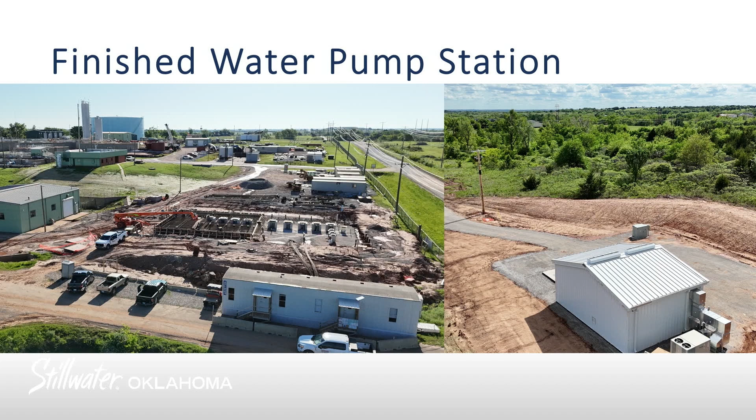And then to the right, also part of this same project, is the recovered water pump station. One of the first things we do when water gets to the water treatment plant is we knock out all the solids and they go out to these lagoons, but with it comes water. So we recirculate that water back up to the beginning of the plant, so it makes the plant more efficient as well. So this project here is about a $30 million project all in.

Let's see, I think I covered most of these as well. So the next project I want to talk about is the chemicals project. It started at the beginning of this...

Yes. If you could go back just to the funding there. The $30 million, partially funded by ARPA. The rest of it's coming out of basically rates, correct? Correct, yes, okay. Sort of. And Candy will get into more of the dollars at the end, so.

And one other question, what's our current water consumption? This is up to 24 million gallons a day? So, yeah, on average, we use about 6 to 8 million a day. Our peak is around 14, and historically, there was a peak in the winter and also in the summer, the hot days, everybody's running their sprinkler systems. We also experienced a new peak about a month ago when we had the fires. That was around 14 as well. So,

Someone's going to ask this question when the meeting's all over. So with the data center added, what is our average consumption expected to be? Yeah, I've been involved. So we talked a lot about this during our OG&E vote and the public vote, and the economic development agreement that was approved by City Council authorized 2.7 MGD for the first 2 phases. There are projects that are benchmarks that move it up to 3.5, but the current allotment is 2.7 MGD.

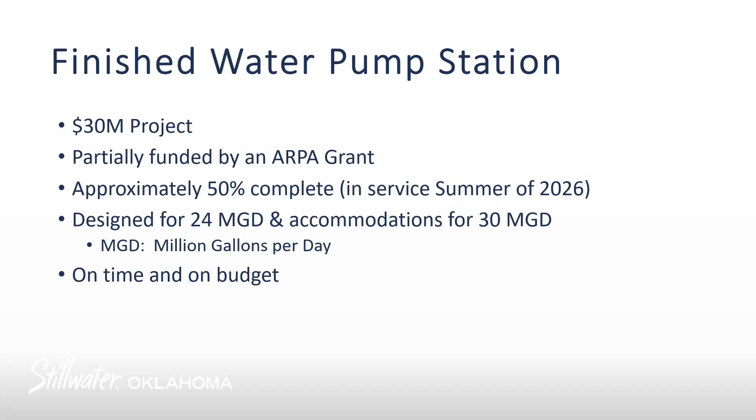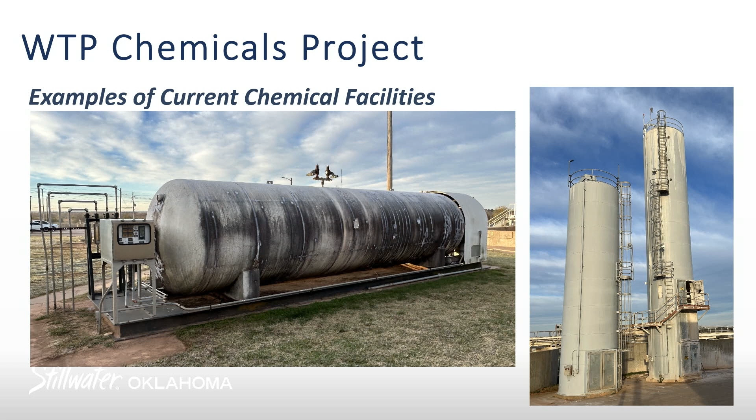And so some of the other things we're going to touch on this project, we're going to touch the ozone system. So that's our primary disinfectant. So that's one of the last things we do before we send the water out to distribution is we zap it with some ozone. And then the other thing we're going to touch is the chlorine system as well.

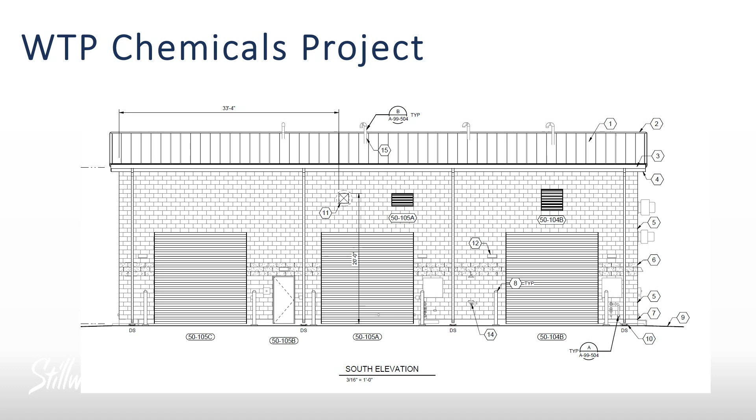I think I've covered a lot of these. We're about 10% done by dollars. So this is being designed for 18 MGD and accommodations up to 24. And again, it'll improve the water quality, and this project's on time and on budget.

And so the last project I'd like to talk about is a very exciting one. We're working on a secondary water source for the city of Stillwater. So I know you all know today that our water comes from Kaw Lake through a 36-inch steel pipeline that was built back in the early 80s. And we need to run some equipment through there where we can see where the corrosion pits are, and we can focus on strategically making those repairs at a very cost-efficient amount of money by using this equipment.

So in order to do that, though, today you can only shut down that line for about 6 hours, and then we start to run out of water. And so we need this secondary source to feed water to the city. And so that's going to be one of the reasons why this project's important, is for water resiliency. But it's also important for a very cost-effective way to do peak shaving.

And so peak shaving is just like we talked about earlier, our average demand is 6 to 8 million gallons per day, but it can go up to 14 as well. And so you really need to design your water source for your peak days. And so that would mean building a secondary line all the way down from Kaw. Well, that would be very expensive, but a very cost-effective way is to build a 7-mile pipeline over to Lake McMurtry, where we also have water rights.

And we can also move water strategically from Kaw to Lake McMurtry, and then when we're ready to use it, we can bring it back. So on those peak days when we're not getting the water we want from Kaw, then we can turn on the McMurtry line system and supplement that water as well. And so that's peak shaving. And so this probably saves the ratepayers $100 million by doing this project.

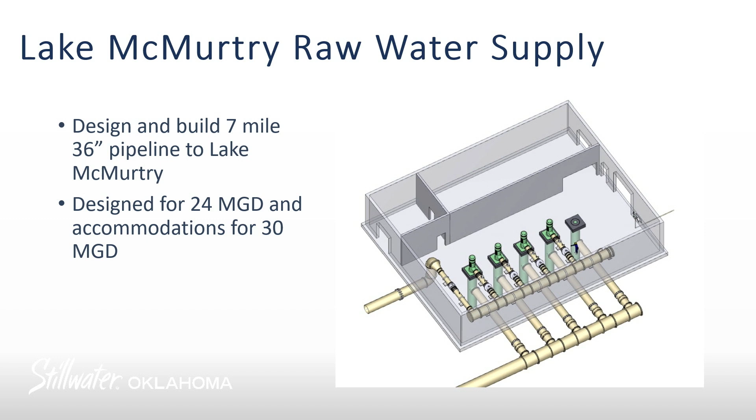And then we're also designing, because we deliver water to the Otoe-Missouria tribe, that if we're working on the north end of the Kaw line, then we can push water all the way up to the Otoe-Missouria tribe. And so they will always have a water supply source. If we're working on the segment past that or south of that, then we can feed them from the Kaw line, and then we would feed ourselves from Lake McMurtry.

Let's see, so we've just completed the 60% design of the pipeline. We're very close on the 60% design of the pump station. We expect to start talking to landowners for easements in the fall, and then start construction in the spring of 2026, and then put the line in service in January of 2028.

That's great. I was thinking it was farther out than that. Brady keeps pushing us to go faster, and we keep listening to him and following his orders. So don't want to disappoint him. No, it's a great project. It's good for the city, and so we're excited to get this one kicked off.

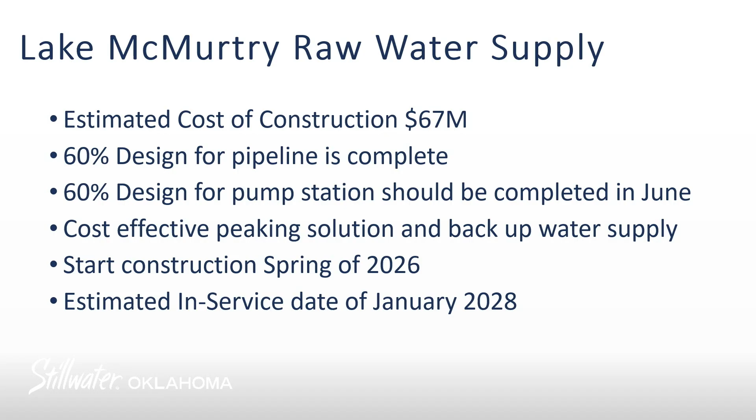Great. Just curiously, is Lake McMurtry below us or above us? Are we pumping uphill or downhill? Which way are we going? So it's downhill from the water treatment plant, but there's a lot of ups and there's a lot of undulations.

And so ironically, if we want to split the stream coming from Kaw, we'll actually have to have a control valve to push some of the water into the plant, and that way we can do a slipstream to send some down to McMurtry. So the way the hydraulics work out with just frictional losses and stuff, it's actually a little easier to get it into McMurtry than it is to get it into the plant, ironically.

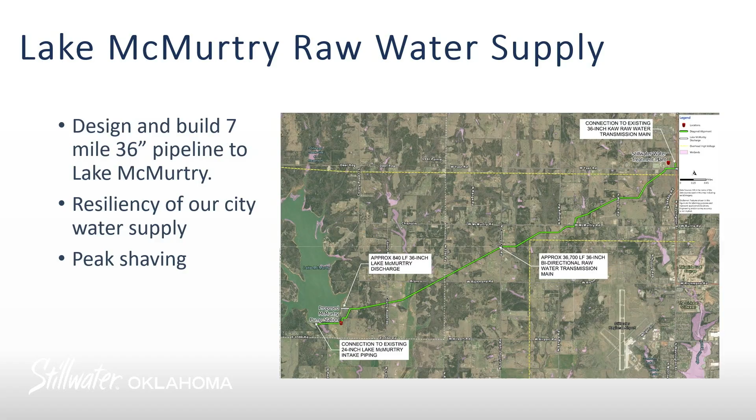All right, Candy. Yes, so McMurtry is as important to us today as Kaw was in 1975 when that group was making those approvals. And today when we're setting this up, it's just as critical. And we're moving into land acquisition next, because we're about 60% design, and next we'll move into land and charge forward.

So returning to this phased plan, Krista's talked about the highest priority, green, red, and yellow. And for the blue items, the solids contact unit, filters, and clear well, the SCU rehab maintenance level projects are included in our FY25 plan. And the filters and clear well are going to be added to our FY26 plan that is just now beginning to be scoped.

This is what that is looking like right now. We've asked our consultant team to start with a scope. It's an expansion from 18 to 24 because our demands have increased and we know about some new demands in our system, with an industrial customer being one of them. And also our agreement with OSU that at any point they might be a backup customer to us, so we have to think about them. And when you get to a place where you're 80 to 90% of your peak, you have to start planning because it takes 5 years to go through permitting and design and all of that, construction, startup, everything.

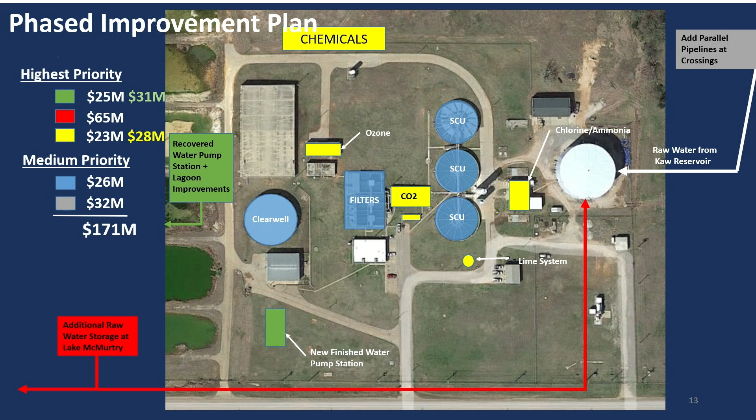And then during some of our evaluations that started in around '17, we identified our filters, and that is on the plan for the filters, the whole filters. We have some problems with our filters in the way that they backwash and in our access to the filter gallery, and the configuration is a disadvantage to us, and so it's been recommended to us that we replace them completely.

We right now have that one about to be abandoned, if it's not already permanently abandoned. It's about to be disconnected instead of just valves shut per some DEQ requirements. And at any plant, if you don't have two of them, you can't maintain one of them. So we have to have a second clear well, and we'll look at that. For an expansion, the chemicals are always looked at.

And speaking of grants, this is a bit of a summary to show you what we've received grants for so far. The yellow or the blue rows show you the projects that are either complete or in construction or in design or in planning. And the grant approved so far is about 9.5 for different construction projects. The grant applications we have right now only for the supply and treatment is 1 million that's going to be related to the North SCU.

There were ARPA funds used for design on the finished water pump station, so you could really add 2 to that 9.5 in total to get 11.5. And then for the future projects where we're not really sure of the total cost for the water treatment plant expansion, filters, clear well, PFAS, that's all just question marks. We'll end up using a lot of loans.

We're working with finance right now on how to fund the FY25 program and McMurtry, which total about 95 million just between those two things. The FY25 program has more than just, yes, it's a heartbreaker. So a lot to spend. Thankfully, we did the rate increases in late 2023, and those are going a long ways to help us pay back these loans. But this is critical needs, and we're pushing through as quickly as we can.

Yeah, because when you say loans, that's a revenue ratepayer loan, right? I mean, we're paying those loans. We get those relatively low interest rate loans through the Water Resources Board, SRF, or different options, yes. And then we pay those loans back from rates. Usually 30 years.

So the things that were on the other slide, the high priority, the green, red, and yellow, we have those. Okay, I'm looking at all of the projects we just discussed. The green and the yellow are in process, and then the red, which is the Lake McMurtry, we're at 60% in terms of design, correct? Yeah, when you say in process, if you're talking about construction, there are some that are actually done with construction. Lagoons and one other one. Cathodic protection are done completely off of our books.

And then recovered water pump station, recycled pump station, and the new finished water pump station are being built. And then the chemicals project is in construction. Okay. Just making sure I understood. And the red is 60% design, moving into land acquisition next. So when that pipeline's done, all of those high priority items will all be done. Indeed.

And honestly, the medium priority stuff will probably be done, some of it. SCUs, filters, no. We're going to do filters with our plant expansion. Chris, what was your date for being done with McMurtry? 28? Yes. We won't be done with our plant expansion by 2028. Not construction, maybe design. It does take a while to move through these steps.

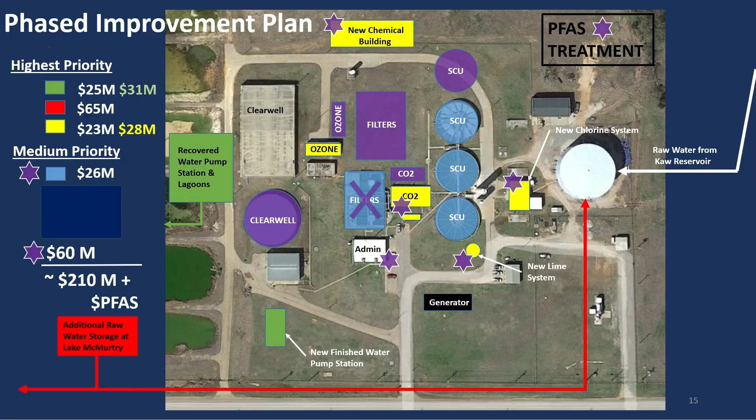Okay, if you could run back to the numbers real quick for me. These? Yeah, sorry. And I don't know if you were finished. I am. Okay. Just jump to questions.

You mentioned ARPA funds of a couple million somewhere in one of those numbers, but we dedicated all of our ARPA funds, $8 million or so, right, to water projects. Where are they in this chart? I might need help. So that 8.6, 8.7 million all went to design and lagoon dredging, I believe.

So the $2 million that's reflected here was additional ARPA funds through the Water Resources Board. Oh, okay. So we already spent the rest of it on the lagoon project, which is done. Or mostly on the lagoon project, which is done. Everything's encumbered. We haven't spent it all, but it's all obligated. Okay. Thank you.

And there are grants also being assigned to non-raw water supply and treatment projects, like just system sewer line work. Yeah, that's actually a really good point that we're talking about.

I don't know what the grand total here is. Is that 85 million a grand total? Yes, it is. No, it is not. I'm sorry, I'd want it to be 210 million. 210 million is the total. I liked 85 better. The priority projects were 124 million. Yeah, is that correct? Yeah, I was trying to be optimistic.

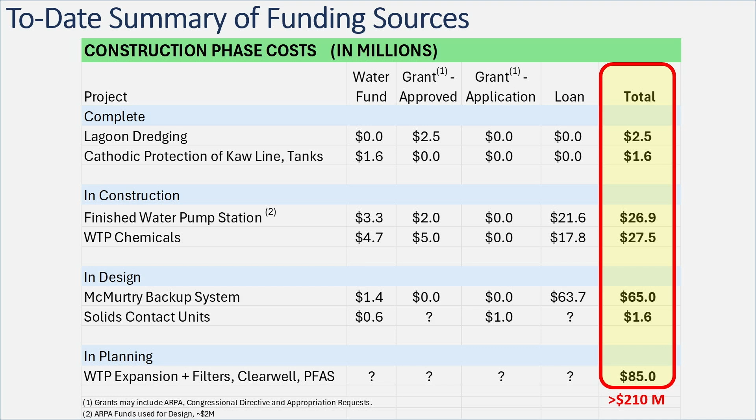And on that note, if you may, council, I wanted to take this time to celebrate the career of Candy at the City of Stillwater and show our appreciation. Unfortunately, she has announced her retirement from the city and will be leaving us soon at the end of the month. She's been, I'm trying to think of different ways to describe Candy, but she's an extremely loyal employee, constantly fighting for our community and our infrastructure.

And this water is her passion, it's her background. She's a professional engineer, certified to do everything, and she has led our teams in all different ways here at the city, but her passion is in water, and she's had a huge impact on these water projects. Her team has been working so hard - Chris, the rest of the crew, David when he was in that role, Bill Millis, all of them have worked so hard to get this back on track with the guidance of this council.

I remember you all saw these navy slides - I was joking, they're ugly, but navy with prime colors. But anyway, you saw these slides 3 or 4 years ago, and you all helped make the decision that needed to be made, which was the McMurtry pipeline and the importance of it. And so we've all been pushing hard together with finance and all these different teams working together. This is a huge, critical project for our community.